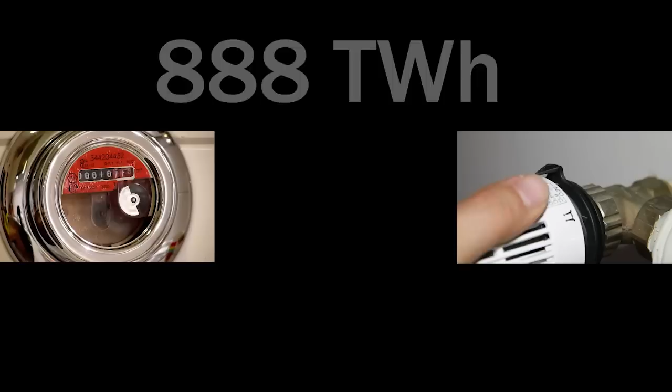Here it should be noted that the proportion of heat production in Germany is 1,400 terawatt-hours. This is far higher than the proportion used for electricity generation, 620 terawatt-hours. Around 888 terawatt-hours are required just for room heating and hot water requirements. In the foreseeable future, the established renewable energies alone will not be able to cover this demand.

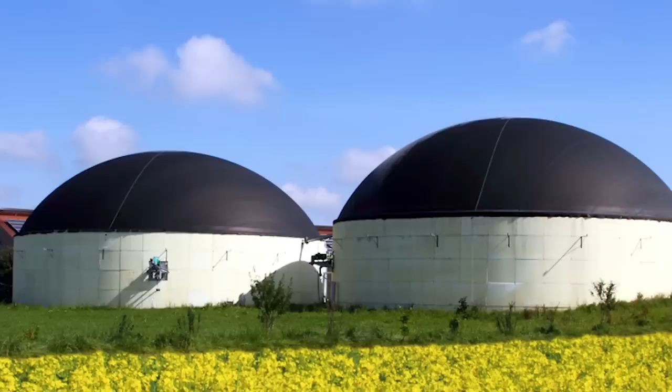For wind power, photovoltaics and geothermal energy, there are not enough locations, consistency in energy supply, or possibilities for storing energy. In many places, new installations attract public opposition. Without supplementary technologies, the energy transition is a task which can scarcely be fulfilled. But there is no time to lose. Potentials are available.

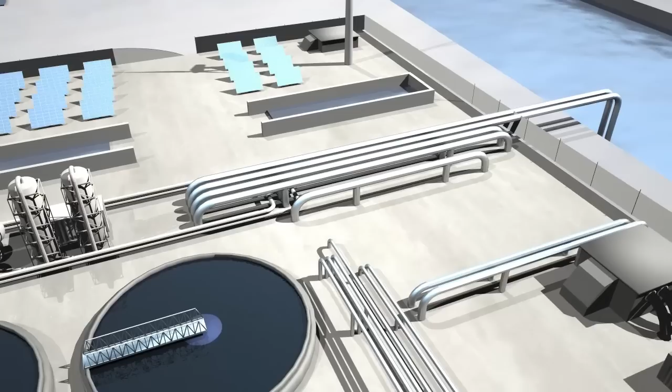Not only policymakers are called upon to tackle the energy problems. Industry must make a major contribution. Above all, key energy-intensive sectors have a responsibility, and one of these is the water industry. After all, water supplies and wastewater disposal require energy, a lot of energy. Often the wastewater treatment plant is a local authority's biggest consumer of energy. But there is also plenty of energy in wastewater.

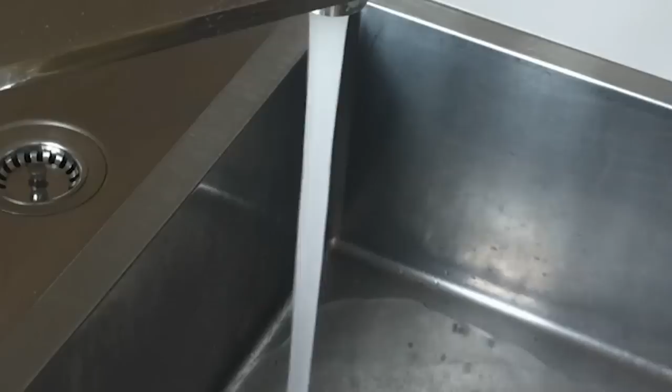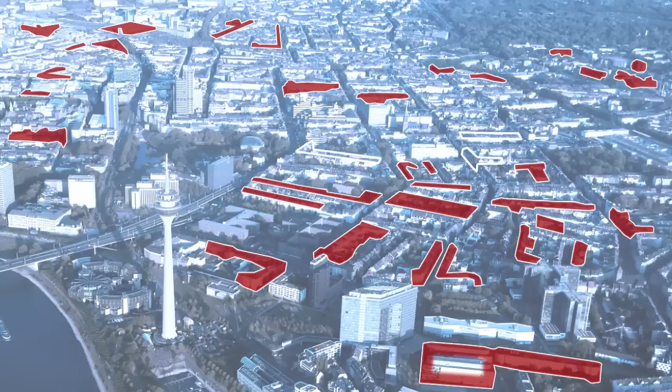Every day, vast amounts of energy that have already been paid for are flushed down the drain. Through showering, cooking, washing clothes or dishes, millions of cubic meters of hot water are discharged into sewers without tapping their potential. Its energetic potential: around 80 terawatt-hours. According to the latest study by the University of Stuttgart, this is equivalent to about 9% of the annual energy requirement for room heating and hot water in Germany. According to the study, every 10th building could hence theoretically be provided with heat from wastewater.

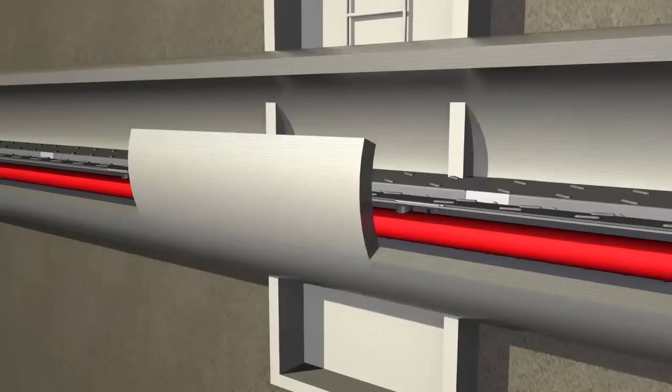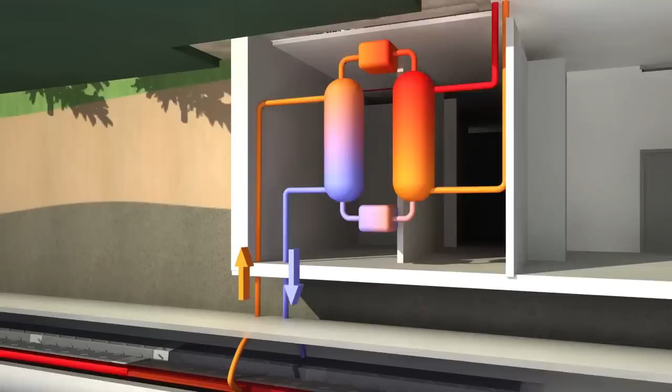Making this heat energy available for use is very simple. The principle has been known for over 30 years. Appropriate technologies have been used for a long time. The flow of warm wastewater, which is between 10 and 20 degrees Celsius all year round, is discharged into the sewer network via heat exchangers, which transfer this energy to an intermediate cycle. A heat pump pumps the heat to the required energy level and provides it to the final customer.

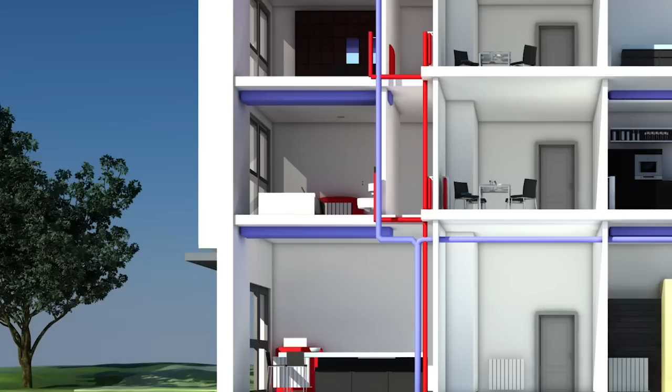However, heat pumps are not only suitable for heating. During the summer months, they can use the relatively cold flow of wastewater for air conditioning in buildings. Their efficiency is greatly improved through combining heating and cooling. The enormous potential for using wastewater heat would be increased several times if industrial waste heat could also be used.

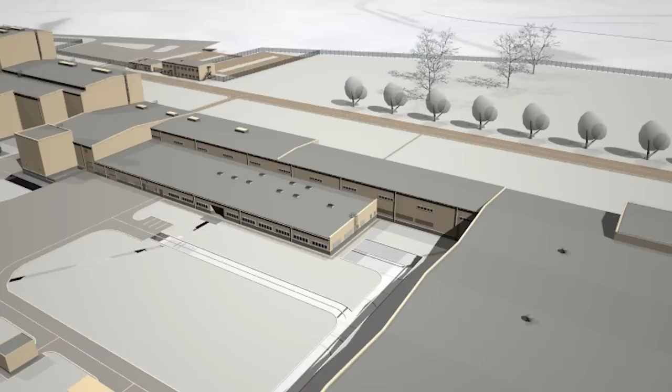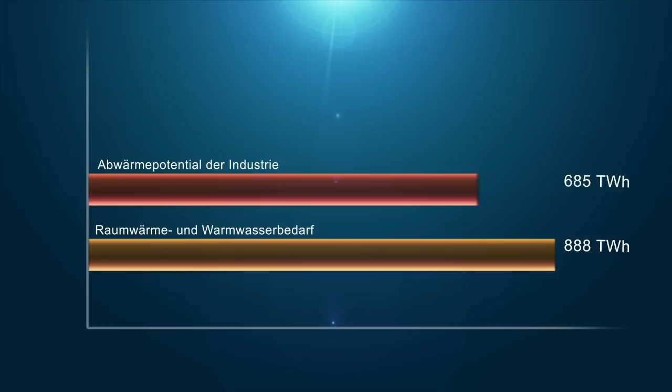Smoking cooling towers are a familiar scene, because virtually every industrial process generates waste heat. Up to now, its energy in temperatures ranging from 20 to 55 degrees Celsius is discharged into the atmosphere without being utilized, discharged into waters in return for high charges, or cooled in cost-intensive processes. The waste heat potential of industry and power plants in Germany: approximately 685 terawatt-hours, more than 3/4 of total heating requirements. This vast energy reserve can be made available through the local heating sewer network.

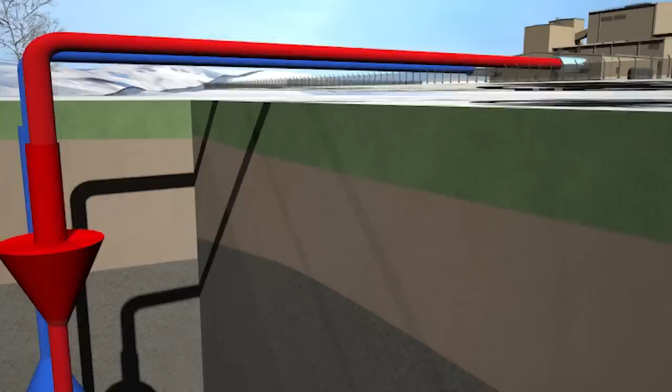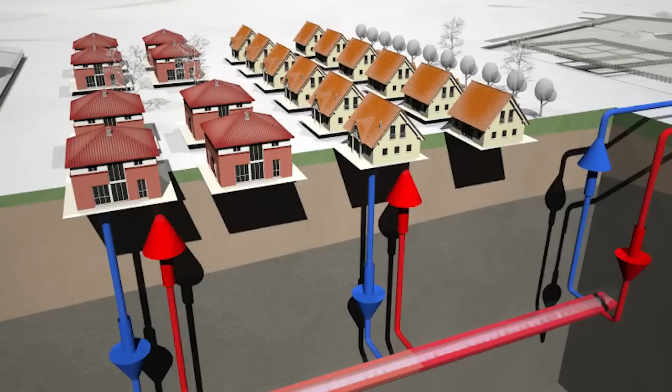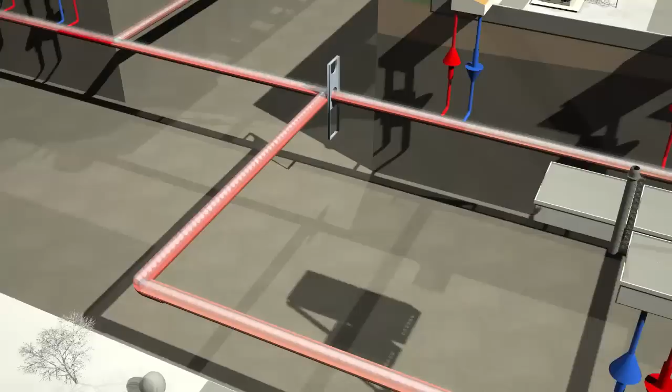Instead of discharging excess energy into the environment and senselessly wasting it, waste heat can be discharged via heat exchangers into the existing sewer network. While the temperature of the industrial cooling media is reduced to the required level without additional use of energy, it increases by several degrees in the sewer network and can be transported with the flow of wastewater. Downstream, where a suitable heat consumer is located, the energy is drawn out of the wastewater by an additional heat exchanger.

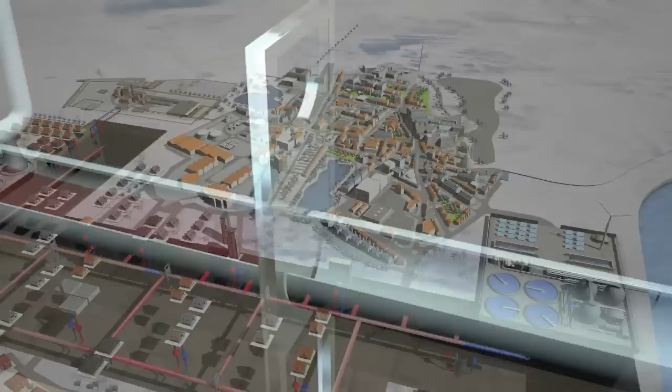Modern sewer network management systems enable the above-mentioned energy flow to be controlled according to requirements. Sewer network management is no longer a vision of the future. Today, this technology is already used in several cities. Such systems can also be used for controlling heat. Using weirs which regulate the sewer cross-sections, fluctuations in flow are compensated and flows of wastewater are directed according to settlement water management criteria or heat criteria. In this way, energy can be directed to the user or even stored.

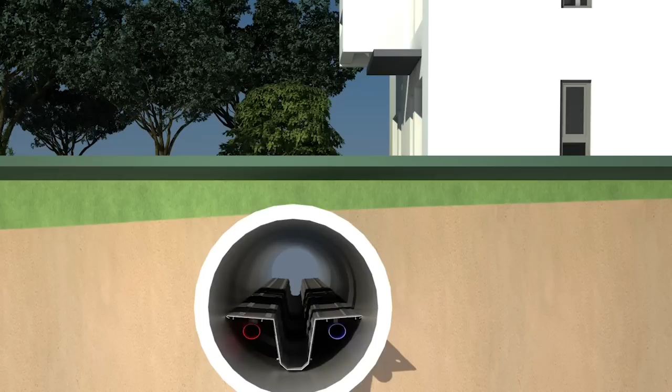Discharging heat into the sewer network even during summer, when the absolute wastewater temperatures are naturally higher, does not have any negative impacts on processes in the wastewater treatment plant, because of the heat storage capacity of the ground. If the temperature level increases in the sewer network, some of the heat is discharged into the surrounding ground. If the wastewater temperature falls, the ground radiates the energy back into the sewer network. Hence, discharges of heat are compensated for along the course of the flow of wastewater. If recooling of the wastewater is necessary before it enters the sewage plant, groundwater wells combined with heat exchangers provide a simple technical solution.

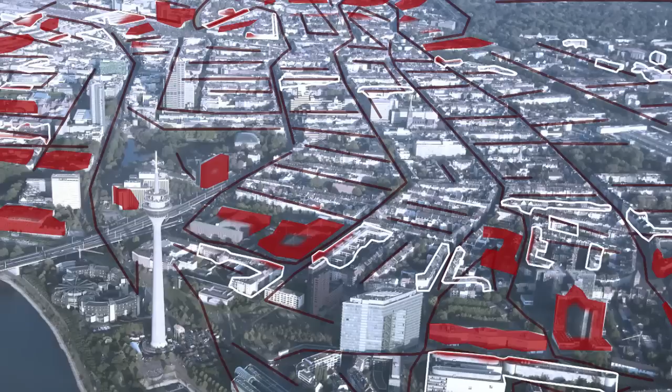Using such a local heating sewer network, which intelligently controls flows of wastewater including the use of industrial waste heat, many municipal households could be provided with energy all year round for room heating and hot water. The efficiency of this innovative form of energy is above all influenced by the wastewater temperature. If the temperature level increases in the sewer network due to discharges of industrial waste heat, the heat production costs are reduced compared to fossil energy carriers. If expected increases in energy prices are taken into account, this effect is even greater.

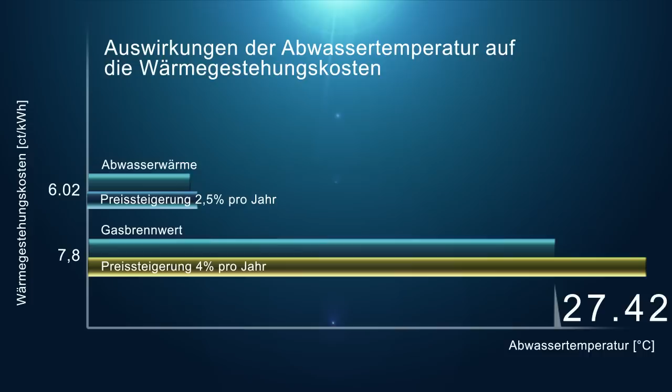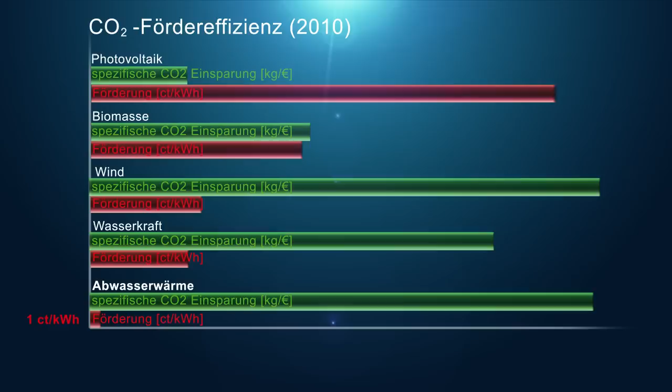The heat pumps require little primary energy, and their efficiency is increasing. Utilization of wastewater heat is a non-subsidized technology. If energy from wastewater was subsidized at the rate of 1 cent per kilowatt-hour, the CO2 reduction efficiency would be 5 times higher than for photovoltaics, around 30% higher than for hydropower, and the same as for wind energy. Hence, the advantages are obvious.

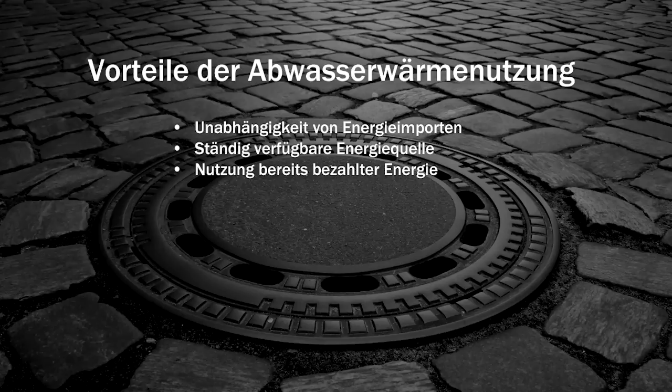Instead of expensive imported energy, Germany will use an energy carrier which is constantly available and has already been paid for. The environmentally friendly technology preserves fossil resources and can make a substantial contribution towards saving on climate-damaging greenhouse gases. Investments in wastewater heat utilization help industry to save costs and to keep added value in our own country.

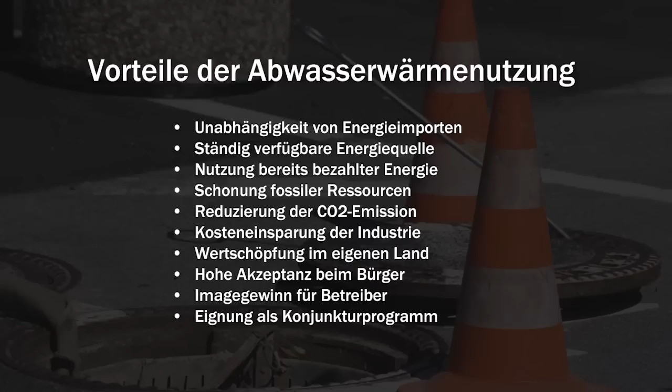Since such plants are completely invisible, they are widely accepted by the public and are associated with an improved image for initiators and operators. Altogether, the utilization of industrial waste heat in local heating sewer networks is therefore excellently suitable for economic stimulus programs. Today, the fairly recent technology of wastewater heat utilization has already been implemented in numerous projects.